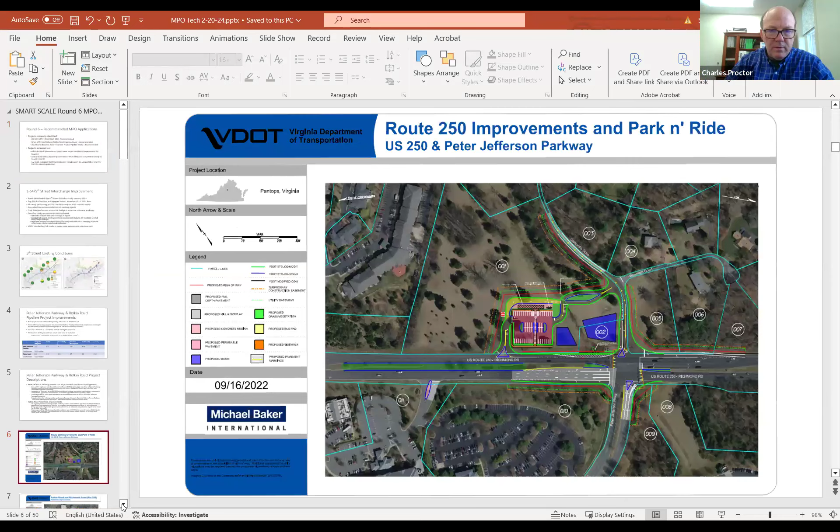Do you want me to share the slides, or do you want to share them from your screen? Probably easier because the bandwidth might be difficult for the visuals on some of these, so let me get down to those. I can find my... all right, whenever you're ready.

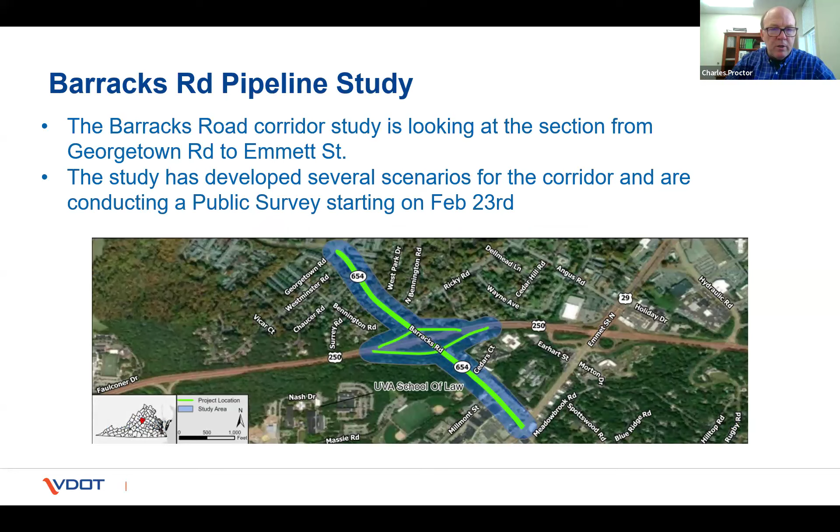All right, keep going. Okay, Barracks Road, like I said, this goes from Georgetown all the way to Emmett Street. And we are actually going out to public survey starting Friday, so look for that. We should be having advertisements going out this week for that survey to go live. It's going live on Friday and it'll run through the 8th, I think.

These are basically the visualizations out of the survey that I'm going to present and go through with you. For the Georgetown Road intersection, we're only considering a roundabout option at this location with crosswalks at the intersection to address some of the safety and operations impacts. For this option, we're showing a shared use path on the south side of Georgetown, heading eastward. So that's basically what we're looking at for that location.

The next slide is the corridor. We are looking at closing the crossovers along the corridor and reducing the median width, which will give us enough room on the south side of the road to shift the lanes over and put a shared use path on the south side without significantly impacting the properties on the south side of Barracks Road.

The other option we have for the corridor is just doing infill sidewalk if we didn't do the shared use path and close the median. So that's the alternative for that corridor.

Hey Chuck, the first slide showed a shared use path also going north at Georgetown. How far does that go? I don't think it shows a shared use path—the shared use path is the red portion shown on this slide. The other parts are just sidewalk.

There's currently an existing sidewalk on the north side of Georgetown Road, and we would basically not bother that. I mean, at the intersection we would actually make improvements to accommodate the roundabout, but we would put back the sidewalk. The shared use path is currently just on the south side. Okay.

I had a meeting with Diantha McKeel from the county a couple weeks ago, and I showed her these presentations—she was really happy about what we were proposing, especially with these options. Her biggest comment was, can you extend it to the east all the way to the developments, forget the name of the development, on the south side of Garth Road to the Barracks Road, to the east or to the west. Looking at it, I think it's too far beyond the scope of this project—we're mainly focused on the intersection to the east.

I will say there's been a lot of questions about roundabouts and the crossings, and we will look at those—whether we need to include rapid flashing beacons or some sort of mechanism to alert traffic that there is a crossing here. Definitely at the interchange, we will make that evaluation and determination when we get into the design of the concept for the application.

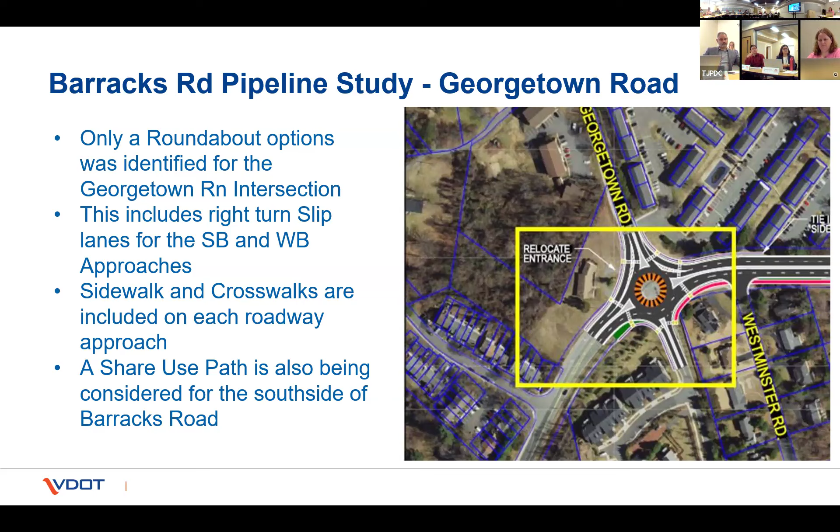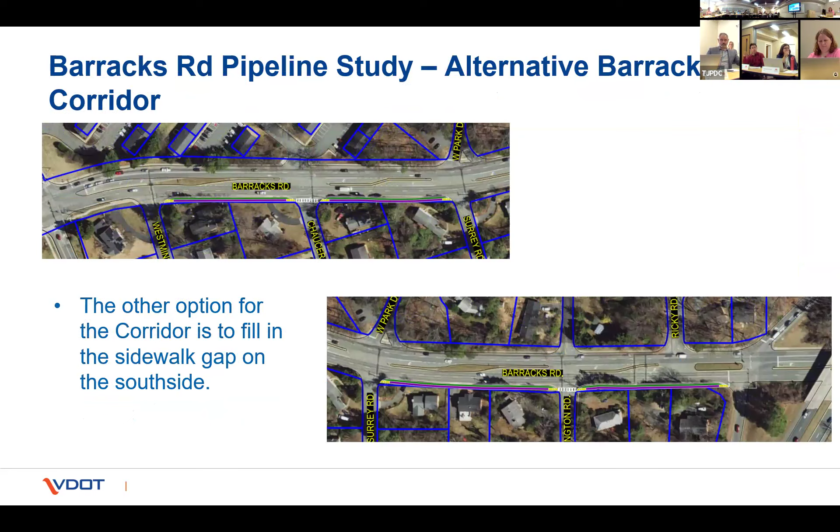Hey Chuck, this is Tommy from Charlottesville. So to summarize this project, there's 3 roundabouts, could be broken up into multiple projects. Currently, there is a northbound sidewalk on Barracks between the overpass and Georgetown. On the southbound side, you are looking at potentially adding a shared use path 8, 9, or 10 feet wide that goes from Georgetown all the way to Emmett, with crossings at the exit and on ramps to the bypass.

My question, in addition to confirming I'm saying this correctly, is for the folks who are walking from like 29 or the city to Georgetown—there's currently sidewalks, but if you're trying to cross over the on ramps by the gas station, how do folks... oh, this picture does show that. One of the pictures—so is that the current situation or is that the proposed?

That's the alternative. This is the alternative.

Currently, I think there's a sidewalk on the north side. There are some telephone poles, there's a lot of utilities that are sort of intermittent through that corridor. That's why we didn't look at a shared use path on the north side.

The other problem is getting underneath the bridges. We would connect the sidewalks. There is like a 5-foot sidewalk underneath the bridge on both sides—it's from the curb to the parapet wall, where the pier columns are, is 5 feet. So that's the only thing that's under the bridge currently. We're going to connect to that with facilities that pedestrians could use. It's just really narrow and you're going to be walking right next to the travelway, so it's not going to be as comfortable.

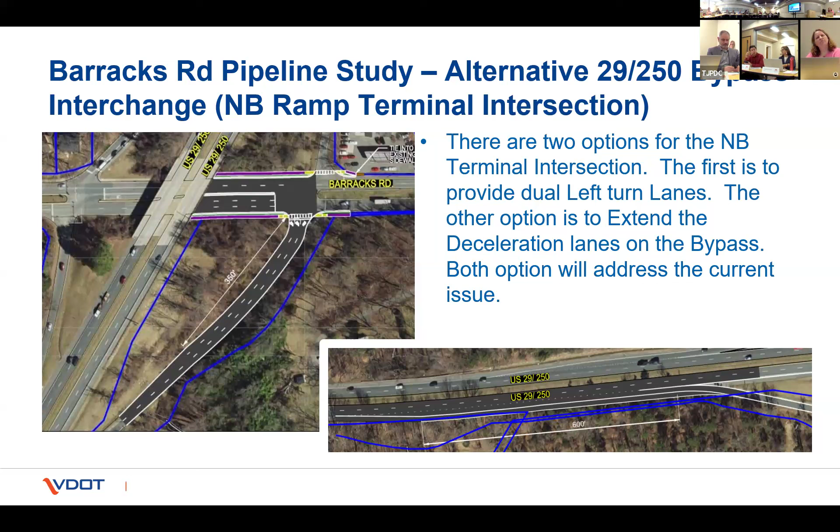The other option is a shared use path on the southbound side, keeping the existing structure under the underpass, which is technically an old sidewalk there, or removing that to get your space. It would probably be removed because we use that, basically the lane that's there and that sidewalk. We'd have to put some sort of curb there, but we would take out some of that sidewalk to put the shared use path in, because we do have to have separation between the shared use path and the travelway. So we want to make sure we have as much as possible there.

So folks who are trying to go west walking or biking, if it's a shared use path on the south side, would have to cross over Barracks and use the shared use path to do that in this option. If you're traveling west on the sidewalk on the north side of the road, you would have to cross Barracks to get to the shared use path on the south side.

If you're walking, you're going to have a sidewalk on the north side because there's one there already, so it'll keep that north sidewalk all the way through. We're not touching the north sidewalk, we're going to leave it in place. If we disturb it with the project, we will put it back, but we weren't going to do anything to improve it.

That's my— the section in the city, this portion, that sidewalk on the north side, basically you've got the parking lots for these businesses right up to the back of the sidewalk.

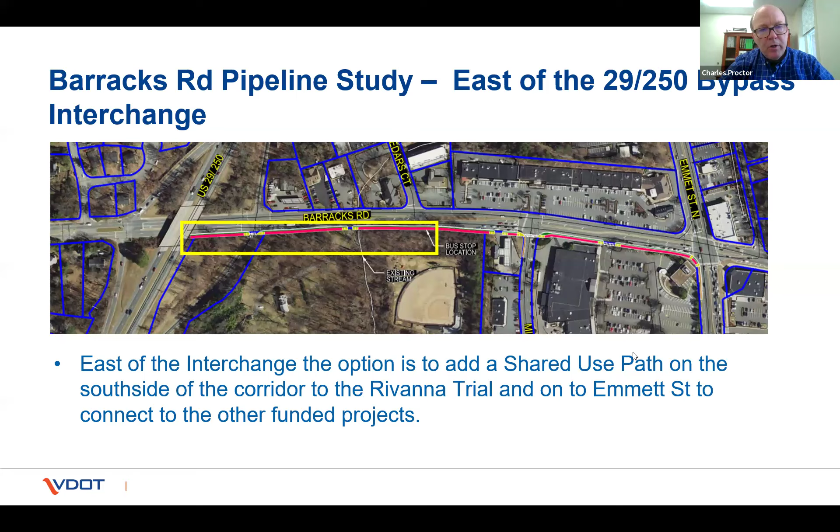We will look for options to put additional crossings of Barracks Road in once we get to developing. That could be some comments you guys could add to the survey, because there possibly could be crossings at the interchange if we do put roundabouts in, and possibly even at a mid-block crossing. But until we get in and evaluate it, I don't know at this point.

Go ahead and take the survey once it goes live on Friday and runs for two weeks, and then get your comments in. Make sure you let everybody know that it's going to be available for them to review and provide comments.

So in terms of the timing on this question, do they need a recommendation from us at this MPO Policy Board, or is it something you can hold off another month and see how this survey turns out?

Well, I think we need to know whether or not we need to be working towards an application. You all don't need to commit to any of the alternatives, and there's no commitment, even if we submit a pre-application, that we submit the final application. I think, Chuck, correct me if I'm wrong, we just need to have a general sense that we need to have this ready and queued up to prepare for a pre-application, correct?

That's my understanding. Next month, we'll see a final recommendation on how you want to- No, is there a benefit of splitting the projects? Next month, we can talk about that in more detail.

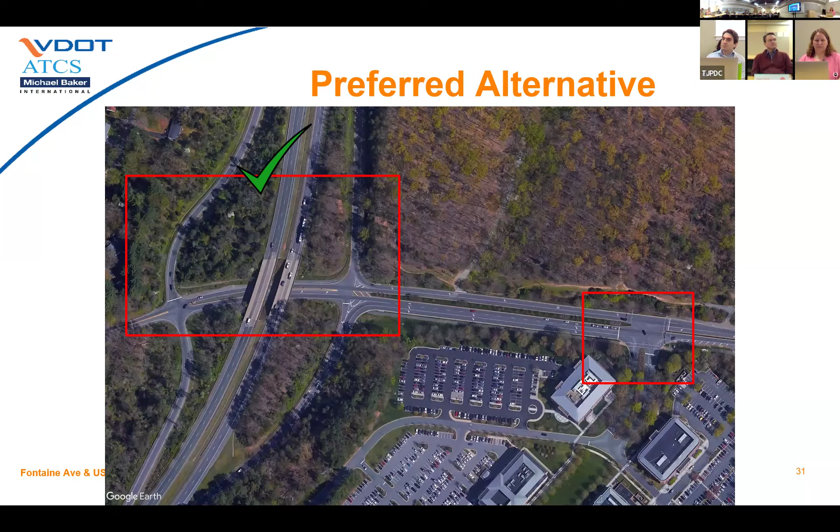Could you go back to the slide showing the alternative? Yeah, that one. Sandy? Sorry, my computer, we lost internet for a second. So actually, over the weekend we got some more preliminary information from Baker, who's doing the analysis.

And basically the preliminary data for the northbound movement, with the U-turns included, the U-turning truck volume, left turn northbound movement for the trucks included, still provides acceptable levels of service in the PM and the AM for the signalized option. So it should perform at an acceptable level.

So Chuck, this is Jessica. Just wondering when we would be able to see some data that really breaks down the operations by movement, and compares the preferred alternative to the displaced left turn. I think the county wants to express a lot of appreciation to VDOT for looking into these alternatives, but it seems like a disservice to all the work you put into it to have our elected officials make an official decision without having time to review that kind of detail of data before making the decision.

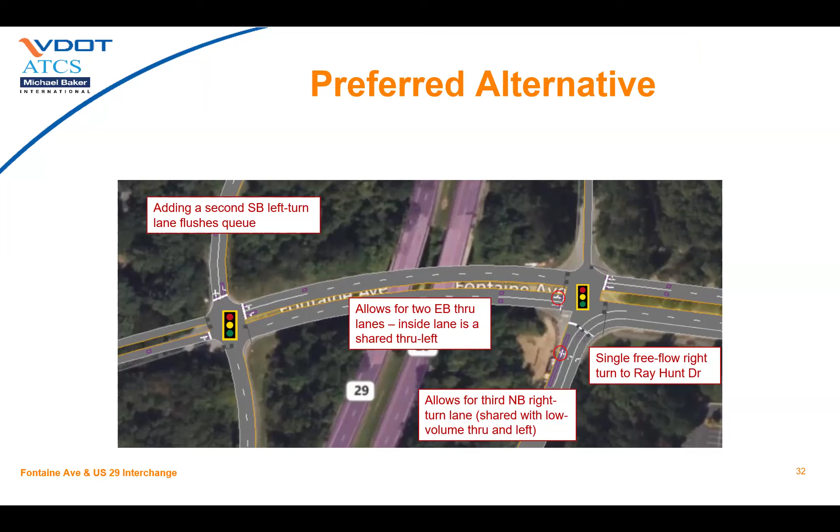I just want to toss in, I have a lot of concern about that right turn movement in the right lane going into Ray Hunt Drive. In the diagrams we've seen before, it's a full-on slip lane with a very wide turning radius. And I know VDOT told me the other day that that's not a design, it's just an operational concept. But we really do need to make sure that that is safe for pedestrians in a final design.

Like I said, there's 2 right turn lanes that go into Ray Hunt. I don't know from a design standpoint, but some of those may be dictated by the university since they're probably going to be making some of those improvements.

The biggest thing is that we have to have a dedicated right lane from the ramp on into Ray Hunt, because that weave issue from that movement is horrible right now, and it's just going to get worse in the future.

My concern isn't really about having the lane itself. It's that if it's engineered like a free flow lane, even if there'll supposedly be some way to stop cars or signal them to yield, people are just going to be blowing right through there. If it's a tight turning radius, like an actual right turn, even if it's not merging with any other traffic, I think that will be a lot safer for pedestrians going along that shared use path.

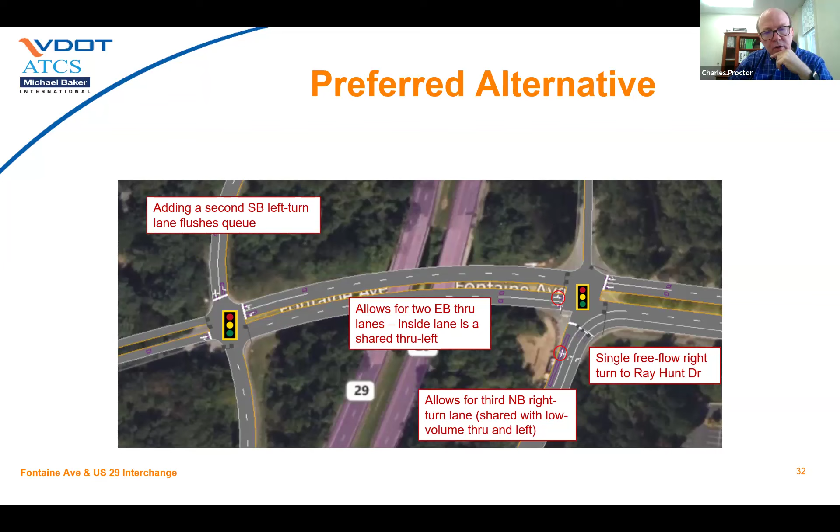Understand. The university is also going to put a roundabout just inside. They're going to relocate that crossover just inside the Fontaine Research Park, and then put a roundabout there. There would be an opportunity to do that, and they're actually showing a bus in their concept. They have a bus stop right there, just inside once you make that turn in, with a bus pull out and everything. How this is going to function with what they're proposing to do, I don't know if that's been fleshed out yet.

But they are looking at a roundabout internal, so that the buses can come in, pick up, drop off, and then turn at the roundabout and go back out into the city. The weave issue is going to be here, because you've got people making the right to go to the parking lots on the west side, and people going to the left to get into those parking lots on the east side behind the buildings. How that's all going to work in the future, I think it's all going to be tied into the roundabout.

So the biggest issue they have now is the weave between the two lanes.

As far as timing, I thought I understood that they need consensus on this from the policy board next week, with or without design and how that design affects operations, because otherwise they need to move forward with the project as funded because of the stage. Is that correct? So whether this group makes a recommendation or not, the policy board will be making a decision next week, with the hope that they have hard data to look at.

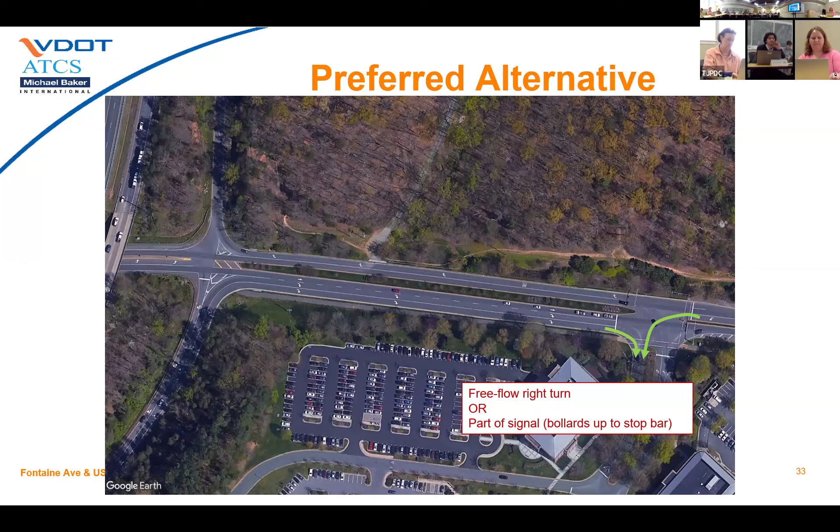Basically it's running about—we're scheduling the internal teams meeting to review the concepts. I actually just got a draft today. We'll be reviewing it not this Thursday, but the following Thursday.

And then we are scheduling the stakeholder working group meeting with the stakeholders group, which will include the city, the county, the university, to talk about Ivy Road alternatives. Concurrently, we're trying to run the survey at the same time, or get it set up at the same time, so we could get it out possibly by the middle of March to get some public feedback. We'll probably coordinate with the county on running their meeting with their citizens group about the same time frame as the survey, so that we can get feedback from both groups at the same time. That's where we're at right now with that.

More to come. Like I said, I just got a rough draft of the presentation that we're going to review next week from the consultant, who is still working on it, so I can start looking at it. Okay, thank you.

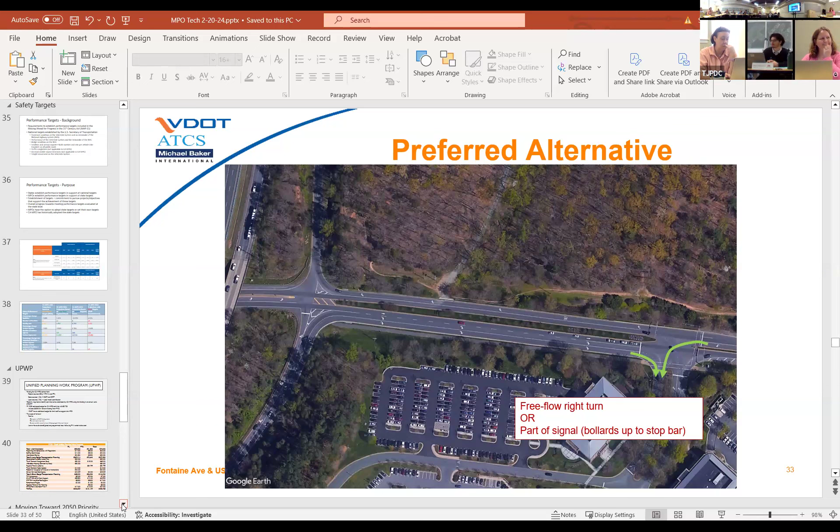MPO targets. Yep. Back to you, Sue.

Sure, yeah. So just as a reminder, every year the MPO is required to establish safety targets, in support of some of these Moving Ahead for Progress in the 21st Century requirements. During our last update last year, we actually updated all of the targets. Most of the targets we just have to update every 4 years, but safety targets we look at every year.

As a little bit of a refresher, basically what happens is in the Federal Highway Administration regulations, they set national targets that are established by the U.S. Secretary of Transportation. The slide up here shows what all of those targets are. Then each state has to set targets that demonstrate how they are going to support the national targets, and each MPO has to establish targets that demonstrate how they are going to support the statewide target. So it kind of filters down.

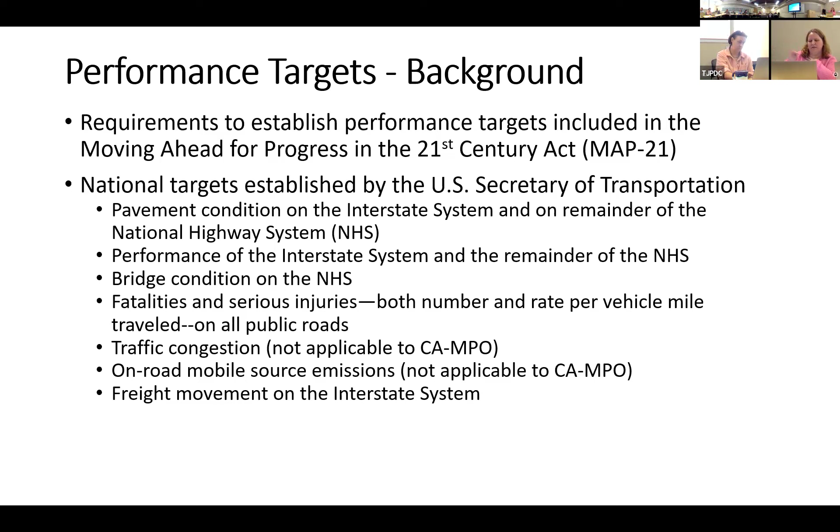So basically, there's no real repercussions for the MPO if we do not meet the established targets. Everything is evaluated at the statewide level. And the MPOs have the option to adopt the state targets or set our own targets.

Our MPO historically has adopted the statewide targets, with the exception of last year, when we adopted our own safety targets based on regional data. So I'm going to go through some of the data that was provided and then ask you all for a recommendation on the safety targets you'd like to adopt for the region.

As part of this process, VDOT provides a workbook that helps us understand what it would look like if we adopt different targets. This workbook included both a recent trend line and a long-term trend line.

So the targets we are adopting are the percentage change in fatalities, serious injuries, and the combination of non-motorized fatalities and serious injuries. Once we adopt that average percent change, it will indicate what the projected fatality rate and serious injury rate will be in each of these categories.

That boils down to a number that shows us, as long as we stay below that number, we have met the targets. I want to make sure I'm very clear to everybody in this room that while we may adopt targets that demonstrate there are still going to be fatalities and serious injuries, this is a priority that we all consider when we implement our projects.

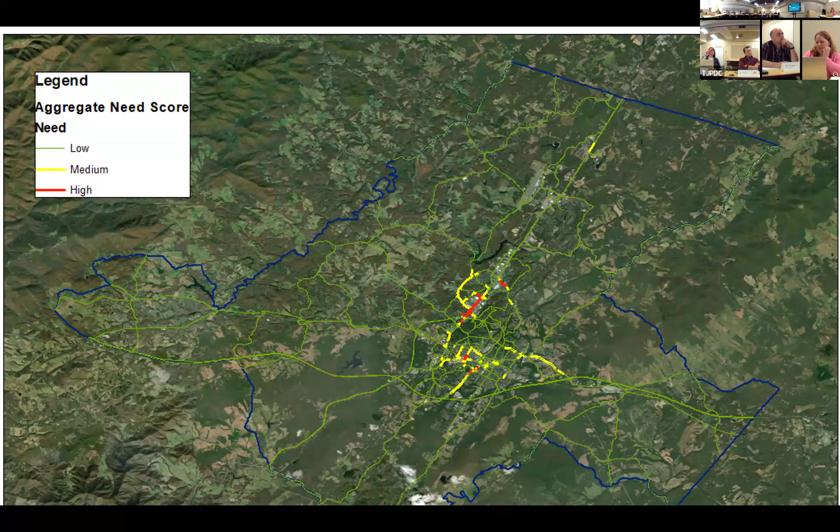We narrowed this down to a high, medium, and low category. So anything that shows up in green was picked up as a need, just not necessarily a high need. We standardized the high and medium categories to show these are probably the needs we want to make sure we consider, and even if something is a low need, it's still a need. It just may not be picked up as a priority if we don't already have a project identified for that area.

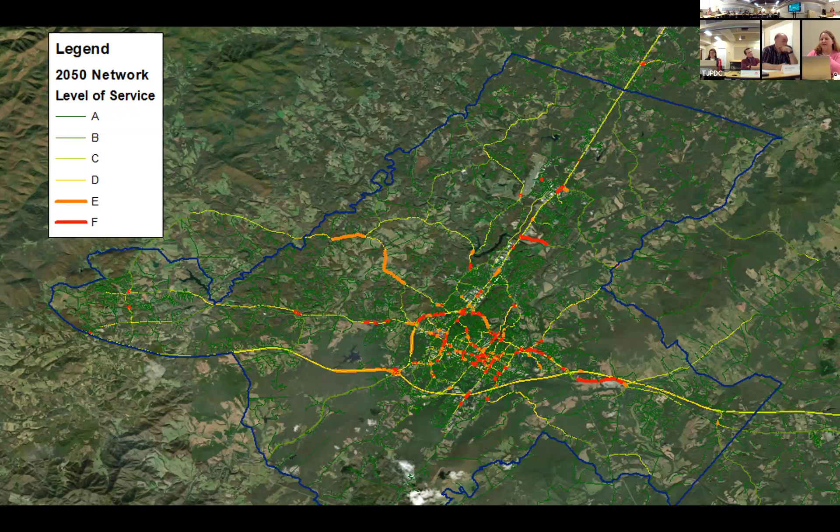The other thing we wanted to make sure we were doing is accounting for future growth, as you had mentioned last month, Louise, also looking at the future projected level of service. I know this group had discussions about maybe resolving congestion not necessarily being the most important goal. But it's also important to look at congestion from a perspective of determining the multimodal improvements we want to construct, so that as congestion conditions get worse, we're providing additional ways for people to move around that provide an alternative to vehicular focused travel. So I think the 2050 level of service helps us understand where we want to make sure we're building our multimodal networks.

I'm not going to spend a lot of time on this, but one of the first things we did was talk to the locality staff to make sure we understood all the projects that are currently funded or have been recently implemented that address one of those needs, because we don't want to focus on those. So we screened out these projects. Most of them are screened out because there's funding committed, but a couple were screened out for other reasons.

For example, this project at Angus Road at Route 29, we could come back and look at this. It's possible there is an opportunity to improve this, but it's also possible that with a lot of the other improvements being committed as part of the hydraulic road bundle, this issue could be addressed. Through additional discussions, the primary concerns we heard were that the issues were really related to private entrances, which might not be something we could address through an infrastructure improvement project.

So there were those kinds of projects that got screened out, basically saying those needs are already being addressed another way, and so we're not going to consider those as priorities for this project.

Sandy, I think we got a mix up on one of the East Highs. That one we have addressed locally needs to go back on the uncommitted needs list. We do not have that addressed. I have a question about another section. That's why we show these in draft form. Sorry, I didn't catch that earlier.

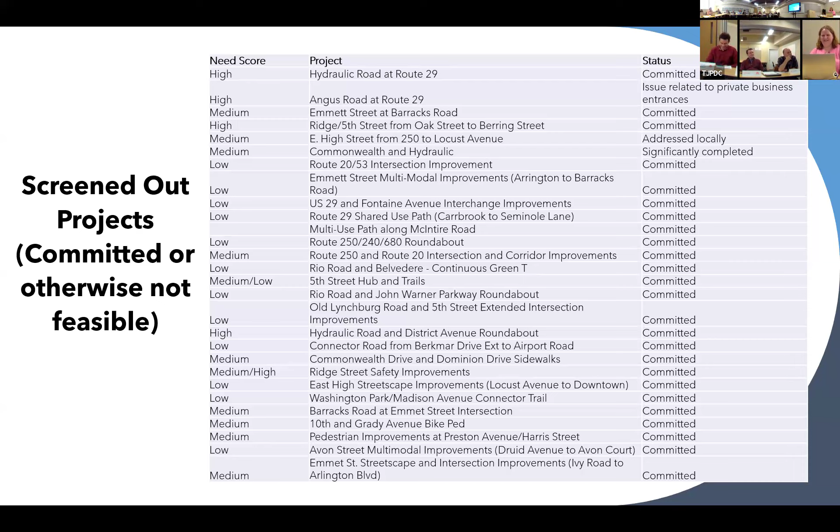No worries. But East High Street, there's another East High Street on here, it's lower down. Yeah, that one is the one we do have committed, working through. But east of there is not. All right, we'll put that back on the priority list. Okay, so add that one back on. I put these at your seats as well, so you can look over those.

Based on this discussion, we have our draft infrastructure priority projects. These include all modes of transportation. It does not include transit service improvements, but it should include all bike ped projects and all roadway improvement projects. And if there's anything related to transit infrastructure, like a park and ride, we could add this onto the list as well.

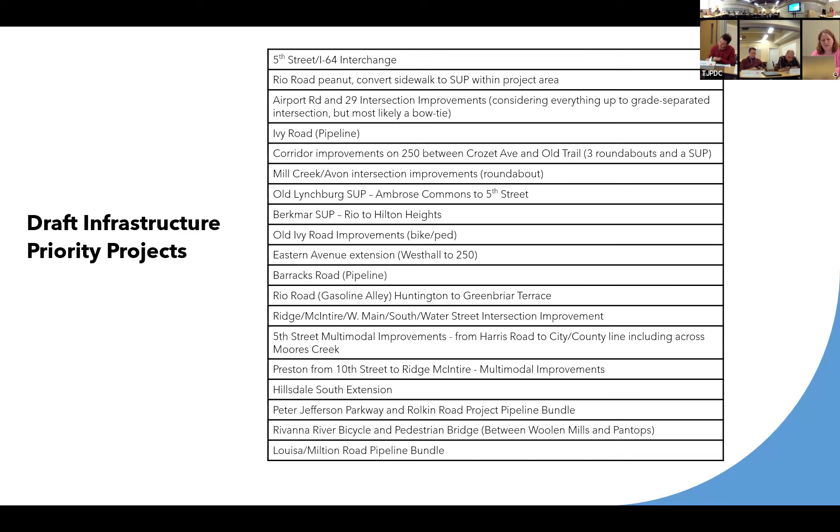So those are the infrastructure priority projects, and the transit service priorities will be in a separate list. We are absolutely going to prioritize and include the high priority transit services. They don't need to be included on our infrastructure list, though. They can be included as priorities on a transit service list.

And then we have our draft planning priorities. These are projects that are either already underway and likely to result in implementing some of these improvements, or there are needs that we potentially want to make sure we're addressing, because we heard a lot of feedback on those and they showed up as a priority need through data analysis.

One of the really interesting examples, I don't know if you saw this before this meeting, Bill, but we got a lot of feedback on JPA from West Main to McCormick, which is something we might want to have some discussions with the university on.